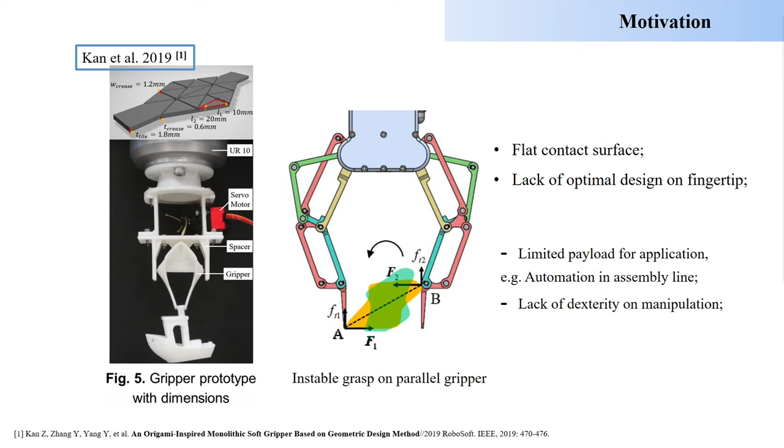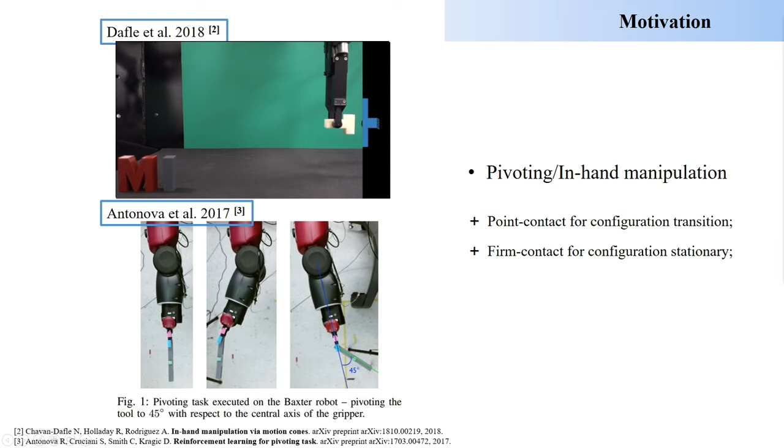From many researchers, it's obvious that parallel grippers are prominent in the in-hand manipulation tasks, and these operations require multiple contact states depending on the different gripper configurations, between a free spinning point contact to a firm multi-point contact.

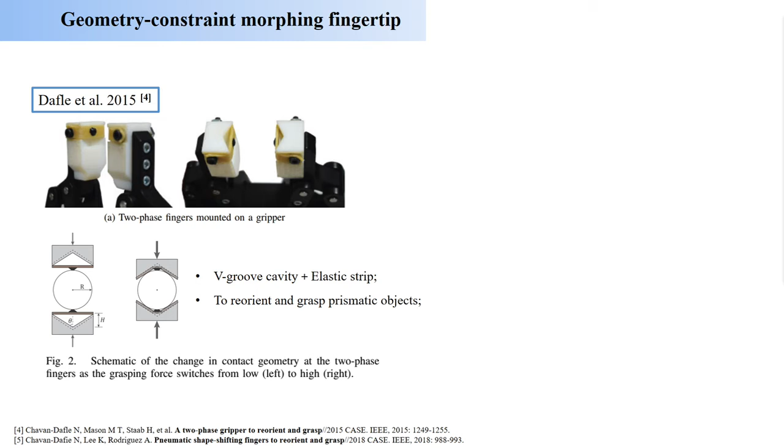In the current solution for specific in-hand manipulation tasks, MIT group presented a series of designs for pivoting tasks of prismatic objects. In their first version design, they proposed a two-phase finger which is composed of a small hard contact point on an elastic strip mounted above a V-shaped groove. The contact states change based on the imposed gripping force and the modulus of the strip.

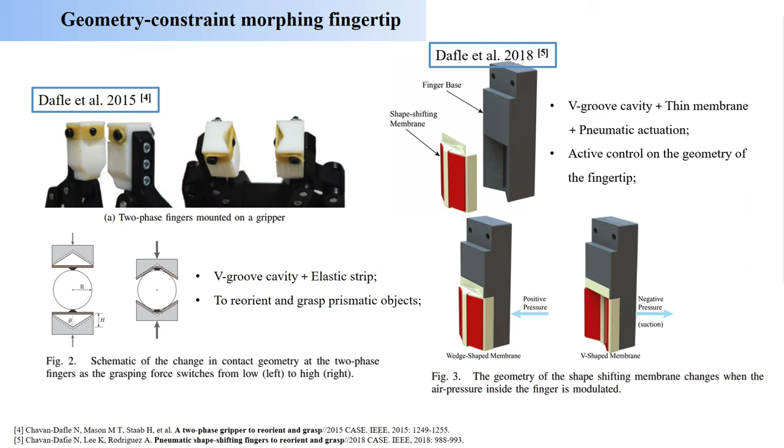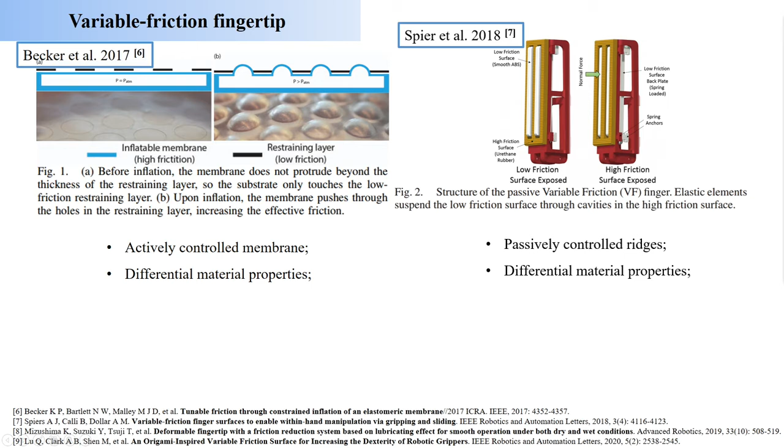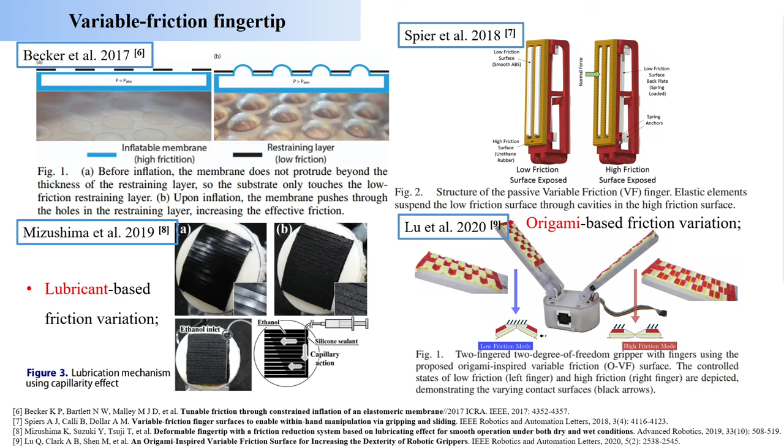In the improved design, by adding a pneumatic actuation, they can actively switch the geometry of the fingertip between wedge shape and V shape. Some other groups try to use friction variation to get the two grasp states, like active pneumatic inflation, passively movable ridges based on material property differentiations. In addition, lubricant is chosen to change the humidity condition of the contact surface, and a reconfigurable structure with two materials is also created.

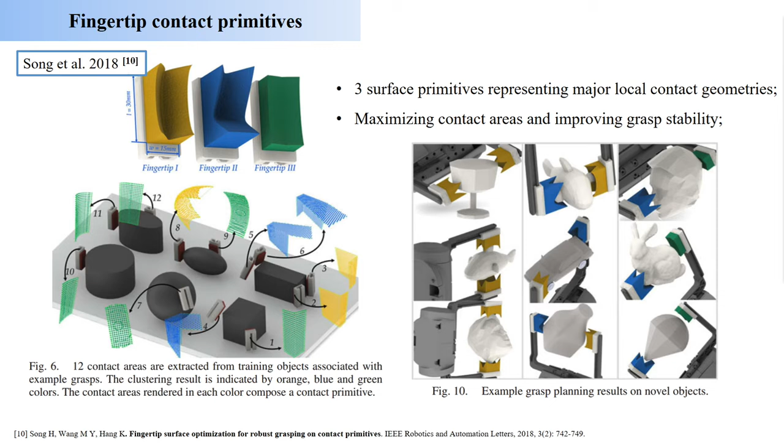For contact surface clustering, Song has shown three typical contact primitives for the representation of major local geometries. The fingertips mounted on parallel gripper are validated on different objects with distinct geometric features and indicated stable and reachable grasps. This work brings innovations for firm grasp based on the morphology of manipulators. According to the three representatives, we try to realize the corresponding grasping approach on morphing fingertip and further extend the functions for the benefits of in-hand manipulations.

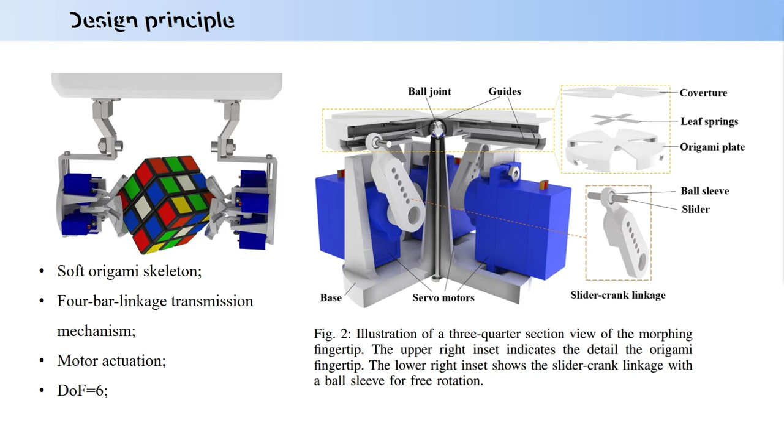So we propose an origami-based shape morphing fingertip design to settle the grasping stability and dexterity problems. In our design, the soft origami skeleton acts as morphing surface, and motor-driven four-bar linkages serve as the actuation and transmission mechanism. On the end effector, there are 4 leaf facets. Each leaf facet is controlled by a servo motor independently.

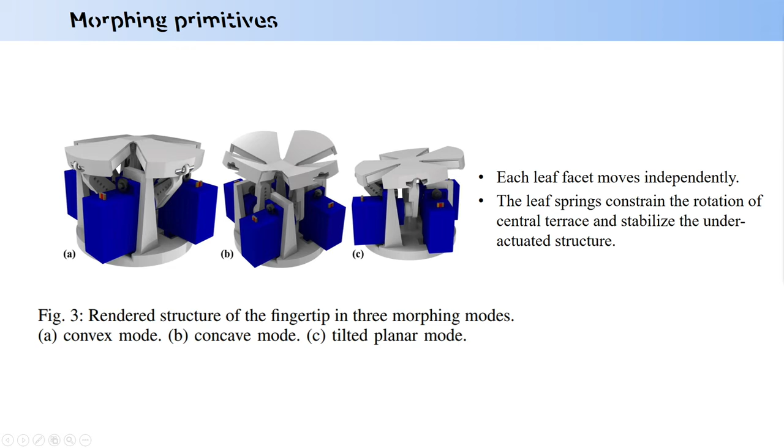Multiple pose states can be achieved by permutation. All up or all down can switch to concave and convex modes. With a suitable rotating angle on opposite motors, a tilted planar mode can be generated. Due to the existence of the leaf springs, the central terrace is constrained on free rotation and the under-actuated structure is stabilized. In the paper, we study and validate 3 morphing types that are commonly observed and essential in robotic grasping.

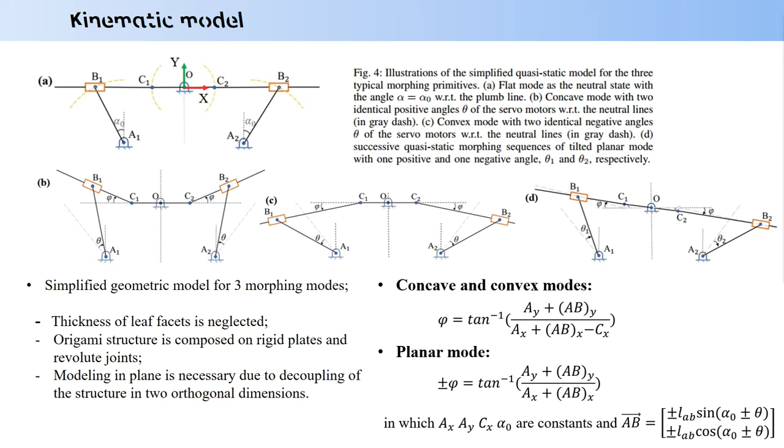For better mode transitions on precise control, a kinematic model is conducted, which is basically a simplified geometric model for 3 typical configurations. So, by calculation, we get the relationship between the motor rotation angle theta and the tilting angle of the facet phi.

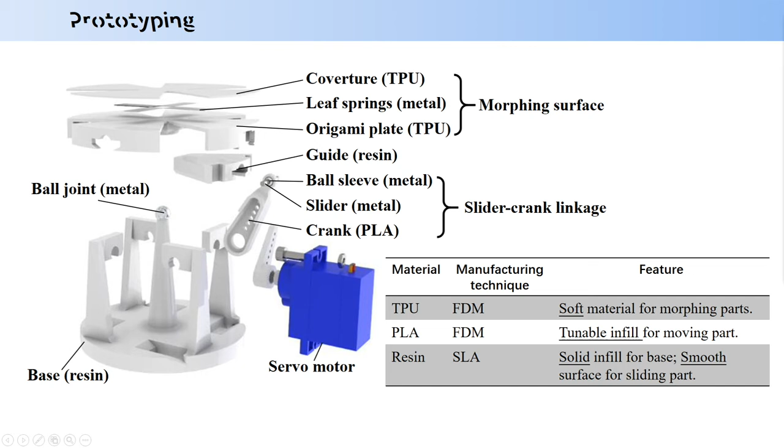On prototyping, we combine different materials with distinct manufacturing techniques for the ease of fabrication and precise control. Soft TPU is used for the morphing surface. Hard PLA by FDM with tunable infill ratio can balance weight and strength, which is suitable for moving parts that are sensitive to inertia. Hard resin by SLA with solid infill and smooth surface is printed for parts with complex force condition and parts with a sliding motion.

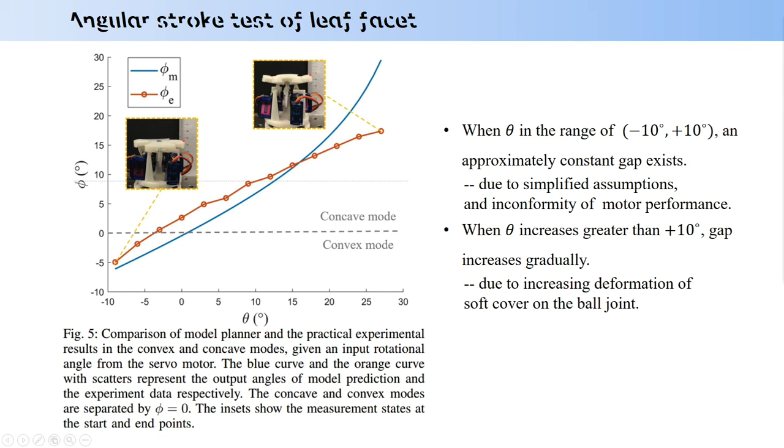We conduct an angular stroke test to verify the prediction of deformed shape from proposed modeling in concave and convex modes. When the motor rotation angle is in the range of negative and positive 10 degrees, there is an approximately constant gap between two curves. This is probably due to the simplification in the modeling and inconformity of motor performance. After 10 degrees, the gap increases gradually, which is because of the deformation on the soft cover of the ball joint. In the future version, the part should be changed to metal cover to prevent undesired deformation and clearance.

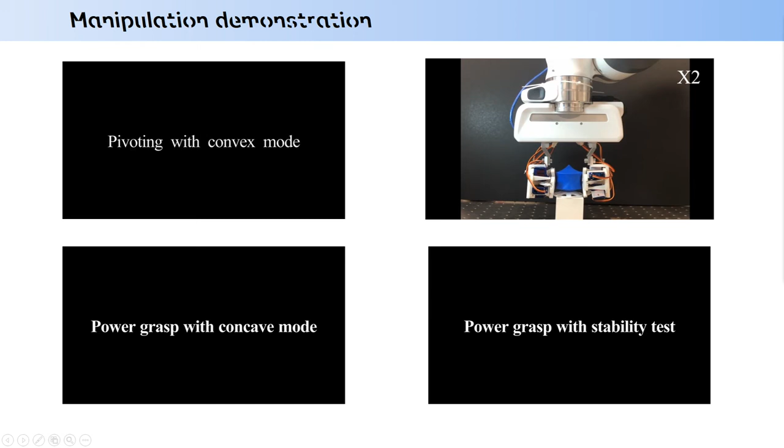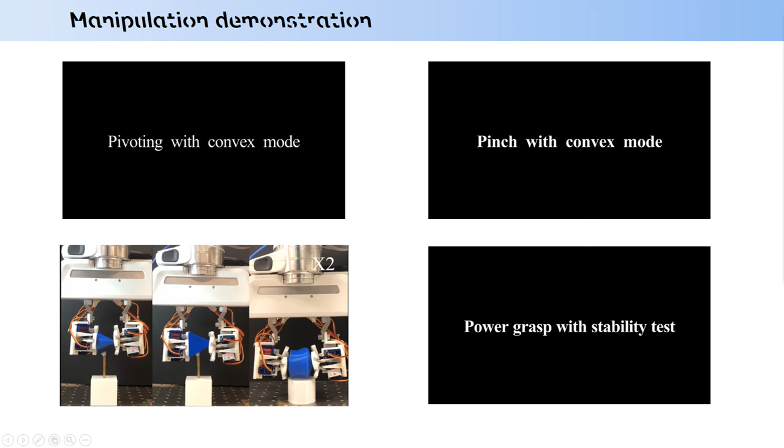In addition, we demonstrate several typical in-hand manipulations and grasping tests for contact surface fitting. We demonstrate 4 distinct implementation scenarios and make comparison experiments with conventional parallel grippers and validate the effectiveness of the morphology design, such as pivoting with convex mode, pinch with convex mode, power grasp with concave mode, and power grasp with stability test.

The takeaway from this paper is it is beneficial to construct transformable end effectors to actively tackle the grasping stability and dexterity problems. The future works may consider the implementation of optimized design, motion planning, or intrinsic control of joints and end effectors.